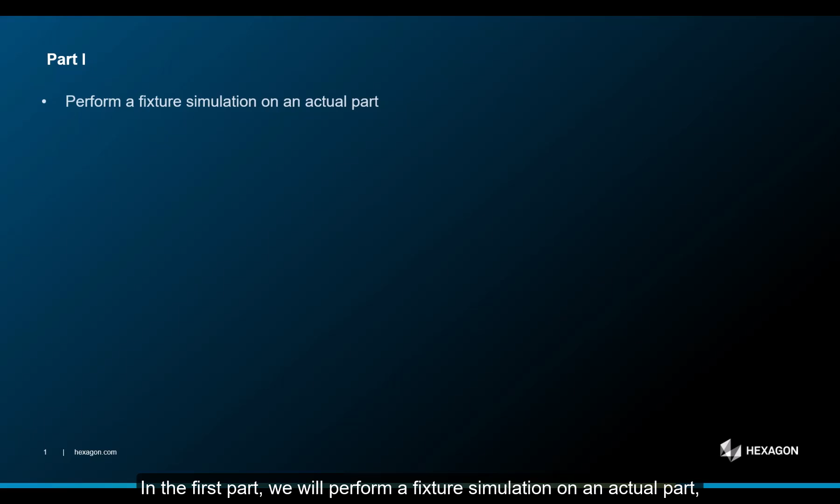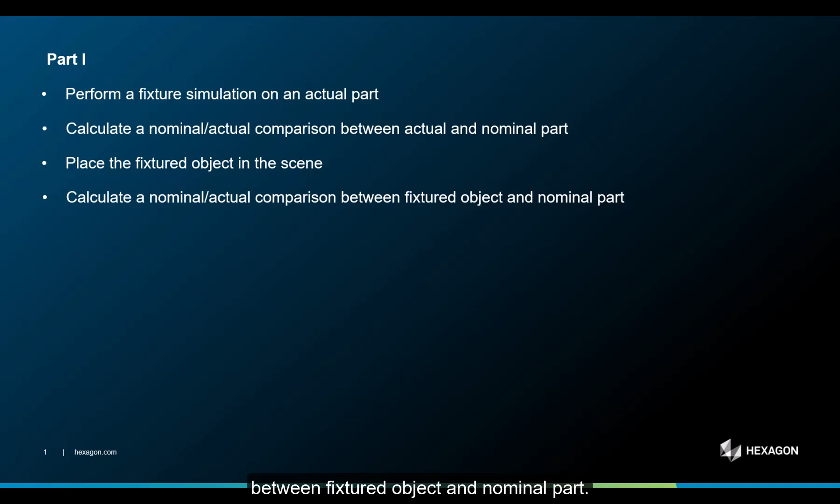In this video, I will show you how to use a fixture simulation in an automated workflow. In the first part, we will perform a fixture simulation on an actual part, calculate a nominal actual comparison between actual and nominal part, place the fixtured object in the scene, and calculate a nominal actual comparison between fixtured object and nominal part. In the second part, we will record a macro for each step and combine the macros to a job that can be used in the fully automated VGinline system.

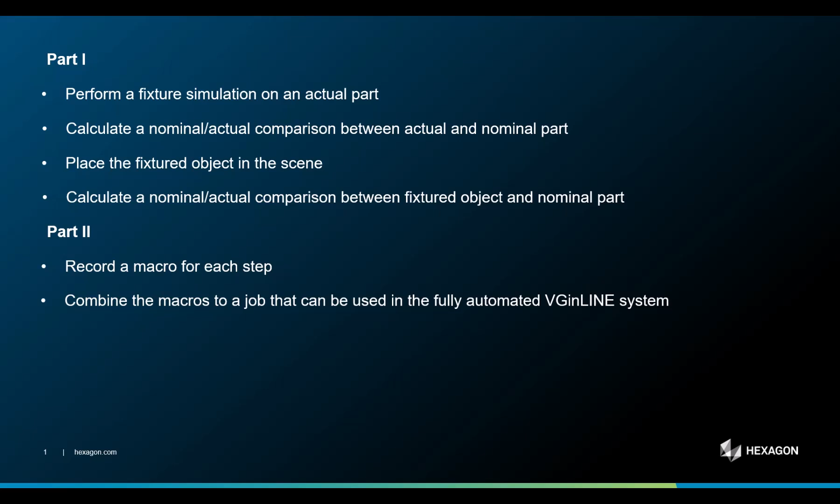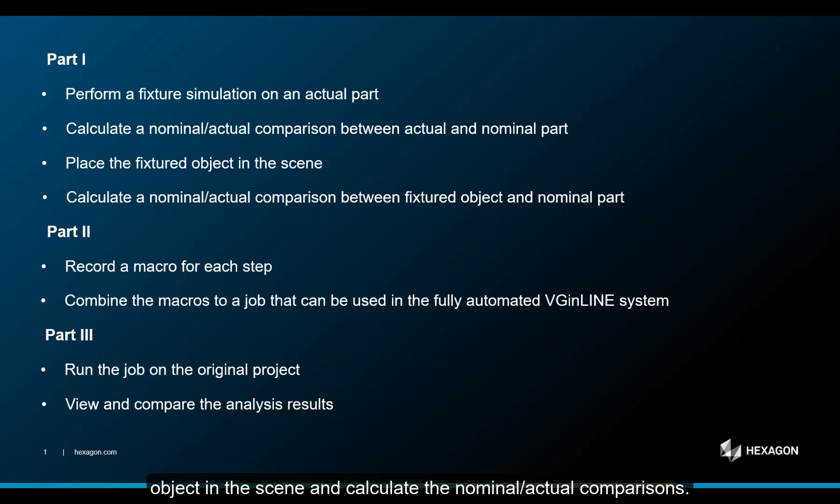In the third part, we will run the job on the original project and finally view and compare the analysis results. So that we can start right away, I have prepared a project that already contains all the objects we need to set up our automated workflow. Let's get started. Remember, first we want to perform the fixture simulation, place the fixtured object in the scene and calculate the nominal actual comparisons.

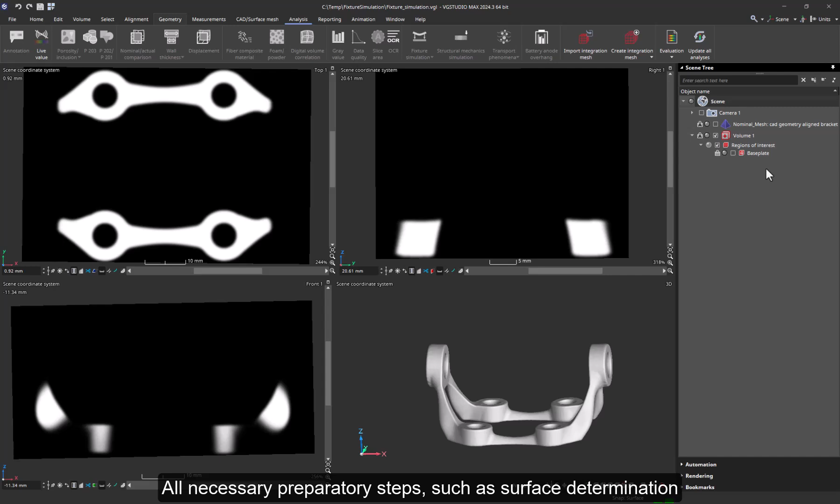I'll open VGSTUDIO MAX, select File, Open, browse for the fixture simulation VGL file, and click Open. In the scene tree, we have the nominal object, nominal mesh, the actual object, volume 1, and the base plate on which the actual object is to be fixed. All necessary preparatory steps such as surface determination and alignment are already done. We can immediately start and perform the fixture simulation for the actual object.

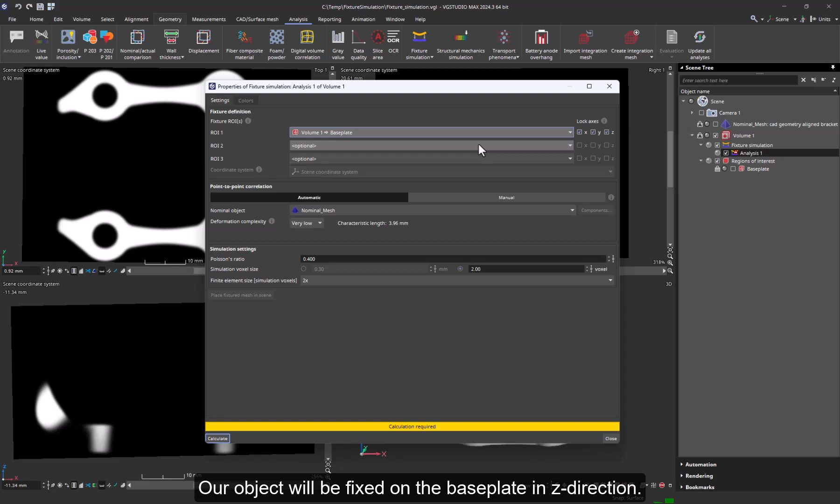Therefore, I'll select Volume 1, the actual object, and go to Analysis, Fixture Simulation. Here I need to select the fixture ROI, in our case the base plate, from the ROI 1 drop-down list. Our object will be fixed on the base plate in Z direction, so I can deactivate the checkboxes in front of the X and Y directions. The calculation might take a few minutes. As soon as it has been completed, we can close the dialog. As you can see, Analysis 1 has been added to the scene tree under Fixture Simulation.

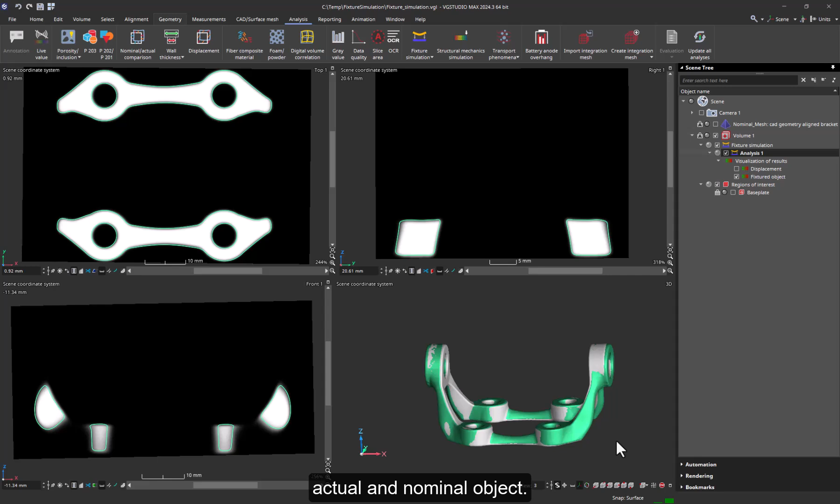Next, I will perform the nominal actual comparison between actual and nominal object. I'll highlight Volume 1 and go to Analysis, Nominal Actual Comparison. Here I'll set the max distance to 1.2 millimeters. To save calculation time, I'll select Performance from the Mode drop-down list. For all other options, I can keep the default settings and click Calculate.

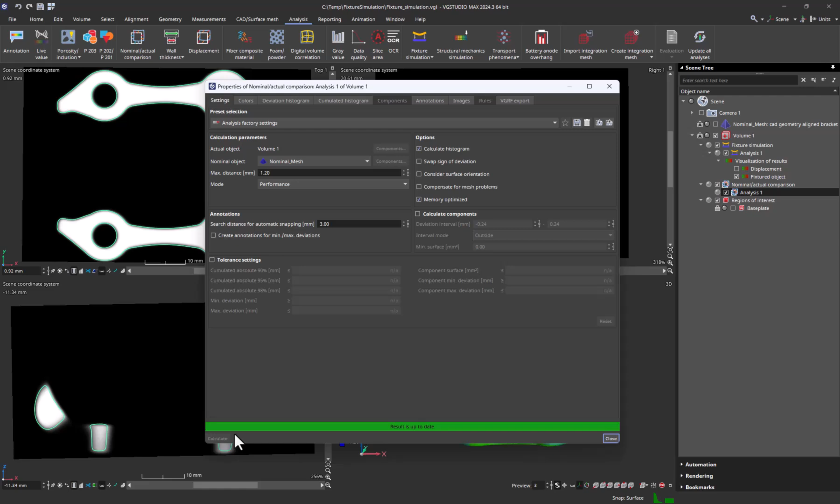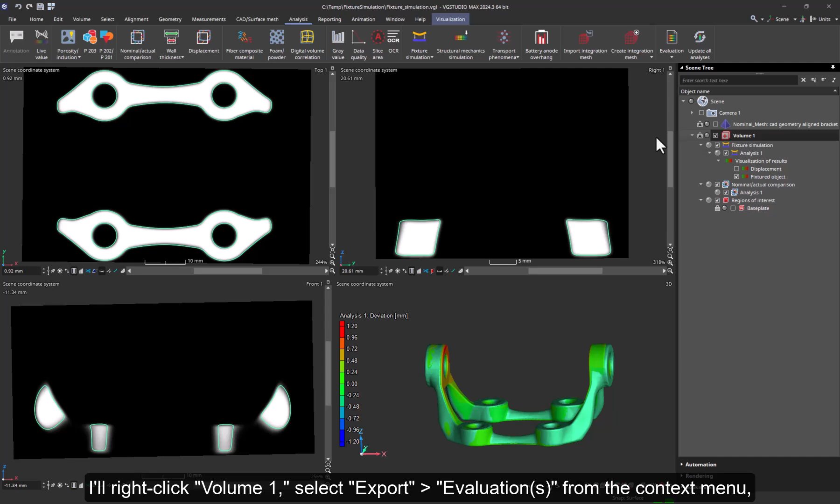To run an analysis in an automated workflow, we need to create an evaluation template that can be imported as a macro step. To do so, we will export an evaluation template that includes the fixture simulation and the nominal actual comparison for the actual object. I'll right-click Volume 1, select Export Evaluations from the context menu, and save the template under the name Fixture Simulation and NAC. If I want, I can add some information here. Then I'll click Save again, and the template will be saved in the specified location.

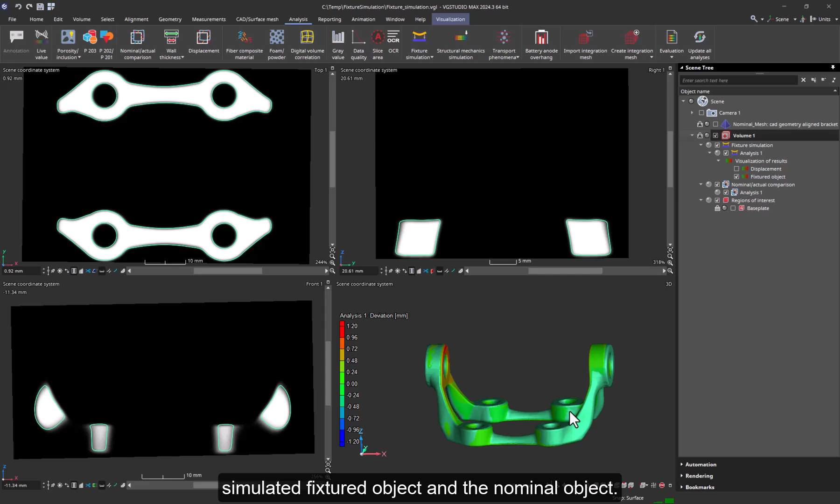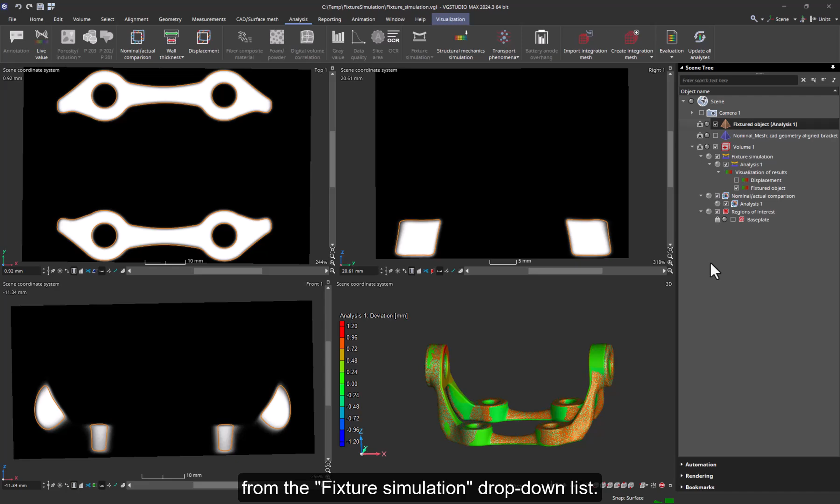Our next step would be the nominal actual comparison between the simulated fixtured object and the nominal object. But the fixtured object is part of the fixture simulation analysis. Since we cannot run an analysis on another analysis, we first need to place the fixtured object in the scene. For this, I'll highlight Analysis 1 of the fixture simulation, and on the Analysis tab, I'll select Place Fixtured Mesh in Scene from the Fixture Simulation drop-down list. This adds a mesh to the scene tree that represents the assembled state of the actual object.

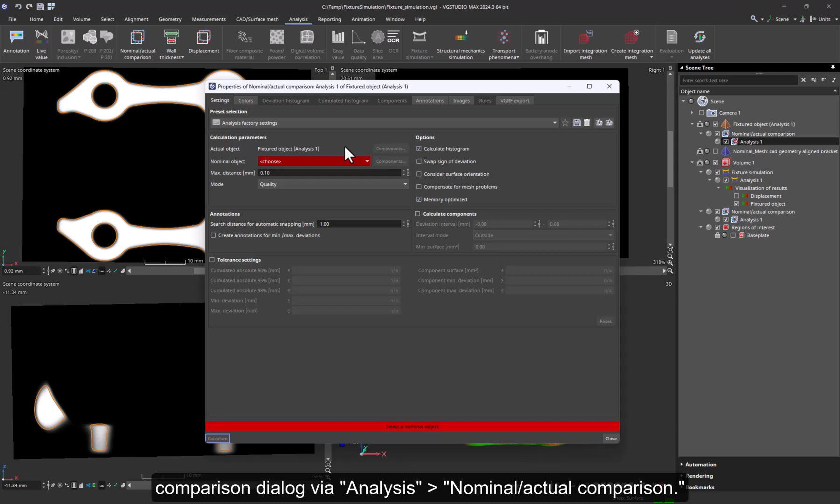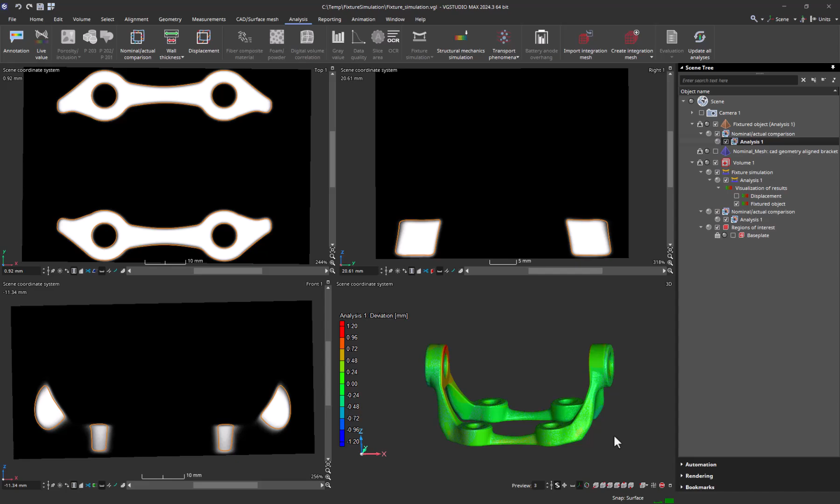Now we can perform the nominal actual comparison between the fixtured object and the nominal object. I'll highlight the fixtured mesh and again open the Nominal Actual Comparison dialog via Analysis, Nominal Actual Comparison. I'll select the nominal object, nominal mesh, and specify the same settings as before. Then I'll click Calculate and close the dialog when the calculation has finished. And that's all we need for our second evaluation template. To export it, I'll highlight the fixtured object, select Export Evaluations, and save the template as fixtured object NAC.

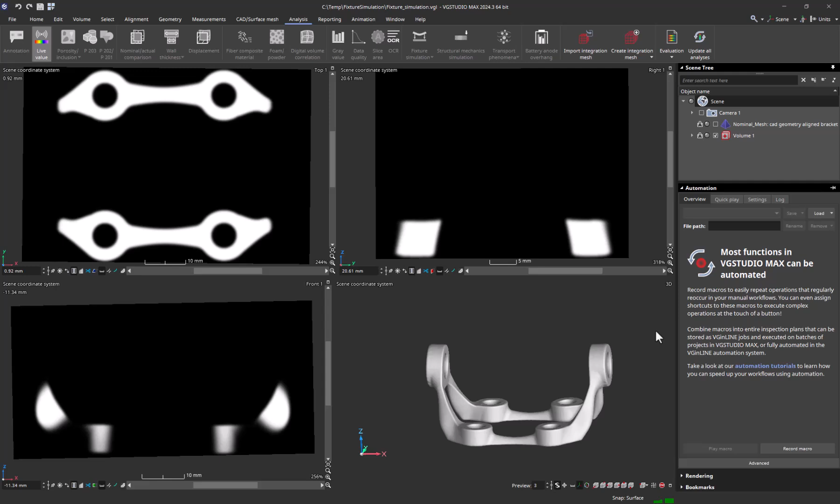The first part is done. We can clear the scene by selecting File, New without saving the project. Next, we will create a macro for each step and combine the macros to a VGinline job. Therefore, I'll open the original Fixture Simulation VGL project again. Let me check whether the Automation tool is available in the tool dock. If not, I can add it by activating Automation in the Tools drop-down list on the Window tab. Let me just release the Automation tool from the tool dock and place it in the middle of the scene. This makes it easier to work with.

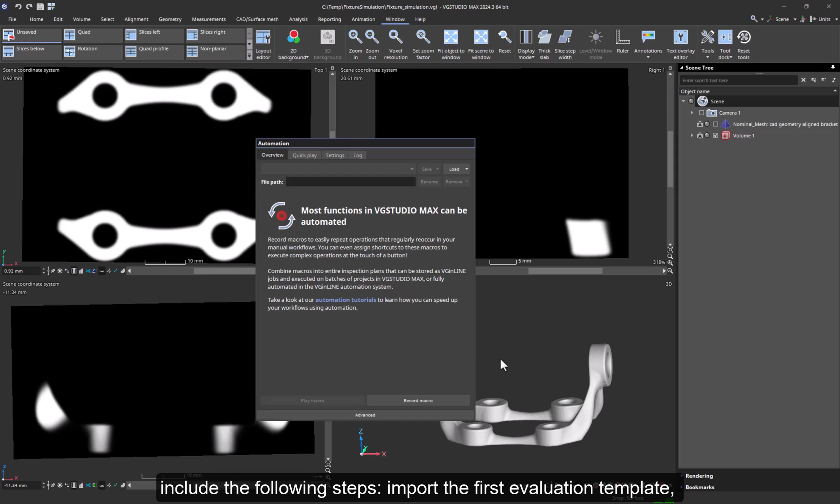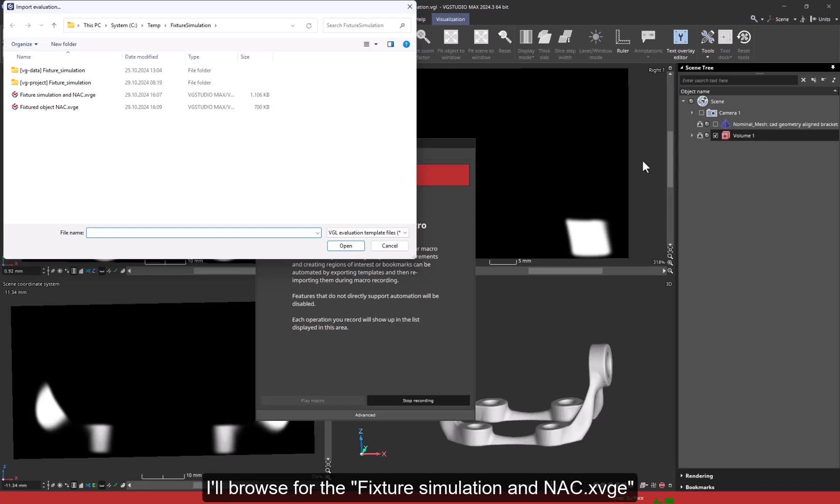For our automated workflow, we need to record 3 macros that include the following steps: import the first evaluation template, place the fixtured object in the scene, and import the second evaluation template. I'll start with the macro that imports the fixture simulation and the nominal actual comparison between actual and nominal object. I'll click Record Macro, right-click Volume 1 and select Import Evaluations from the context menu. I'll browse for the fixture simulation and NAC.xvge evaluation template file and click Open. Here I can keep the default settings and click OK. As soon as the evaluation template has been imported, I can stop the recording. With that, the macro step Import Evaluation Template will appear in the Automation tool.

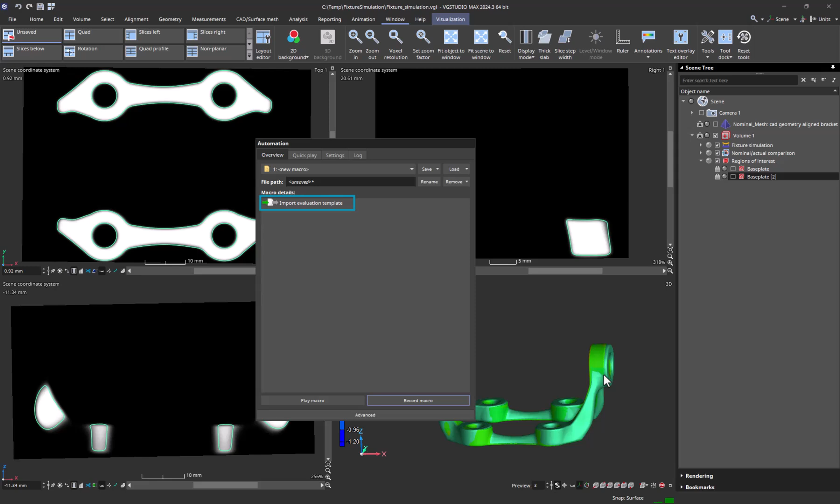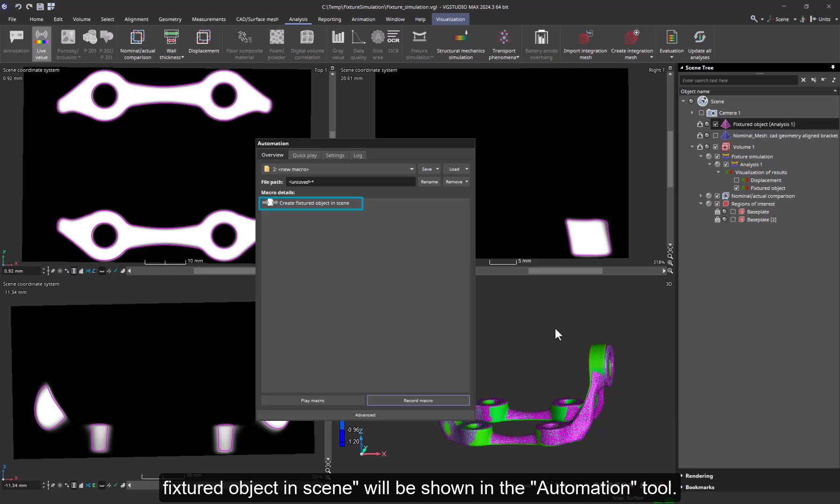Our next macro will place the fixtured object in the scene. I'll start the recording again. In the Scene tree, I'll click Analysis 1 under Fixture Simulation, and on the Analysis tab, I'll select Place Fixtured Mesh in Scene from the Fixture Simulation drop-down list. After the recording has been stopped, a new macro step, Create Fixtured Object in Scene, will be shown in the Automation tool. Finally, I'll record the macro to import the nominal actual comparison between fixtured object and nominal object. Once again, I'll click the Record Macro button. This time I'll select the fixtured object in the Scene tree to import the fixtured object NAC.xvge template file.

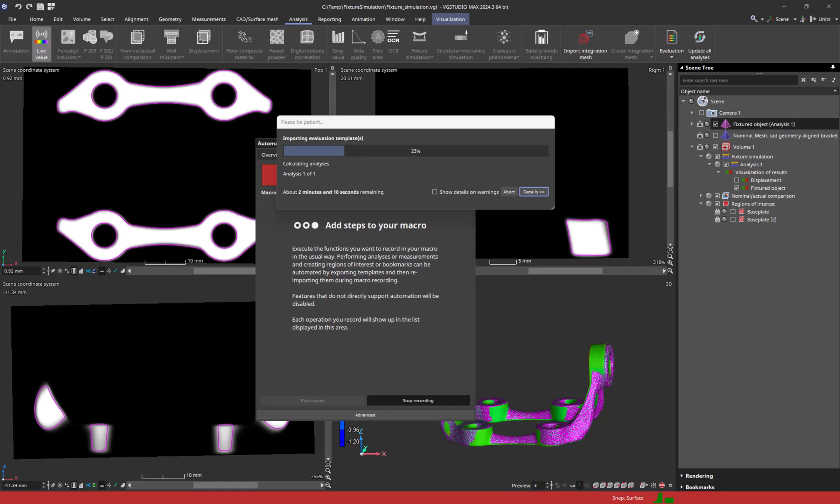Now that all the macros have been recorded, we can organize them and create a job for VGinline. For this, we need some additional options, which are available in the Advanced dialog of the Automation tool. I'll click Advanced to open the Automation Advanced dialog.

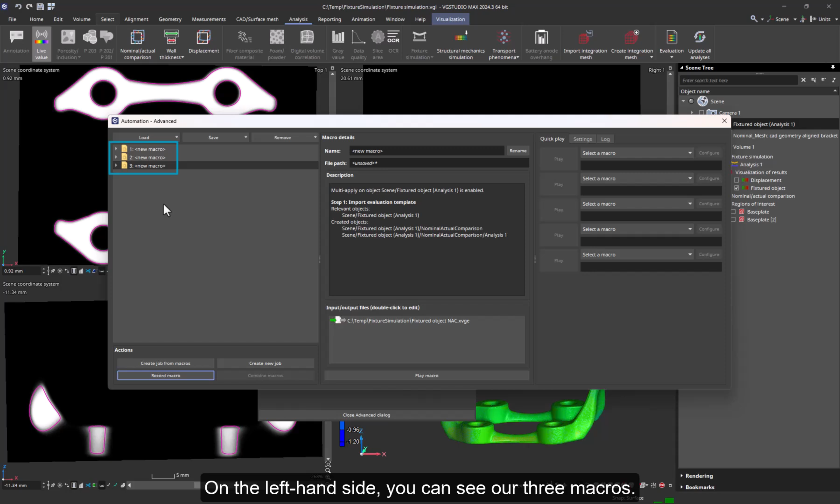On the left-hand side, you can see our 3 macros. By clicking the triangle in front of each macro, we can expand them to see which action they include. It's always a good idea to name each macro according to the corresponding action and save it. Let me just do this by selecting the first macro and clicking the Save button here.

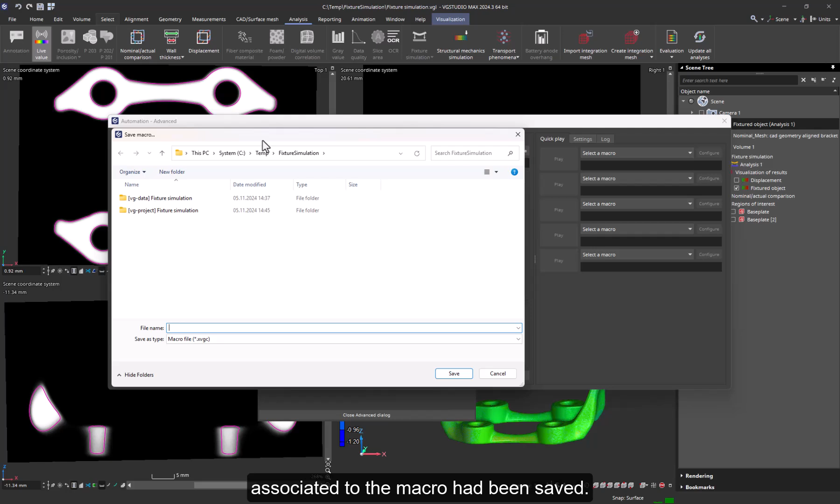The Save Macro dialog will open under the path where the evaluation template associated to the macro had been saved. I'll add a name for the first macro and click Save. I'll repeat this step, choosing a suitable name for each macro.

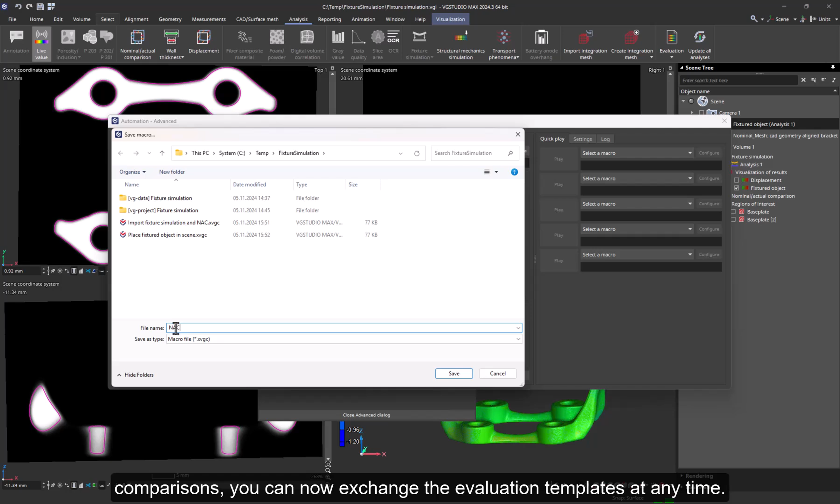If necessary, for example, if you want to adjust the settings for the nominal actual comparisons, you can now exchange the evaluation templates at any time. Remember, for this video tutorial, we wanted to create a job that can be used in VGinline. Therefore, I'll highlight the macros and click Create Job from Macros.

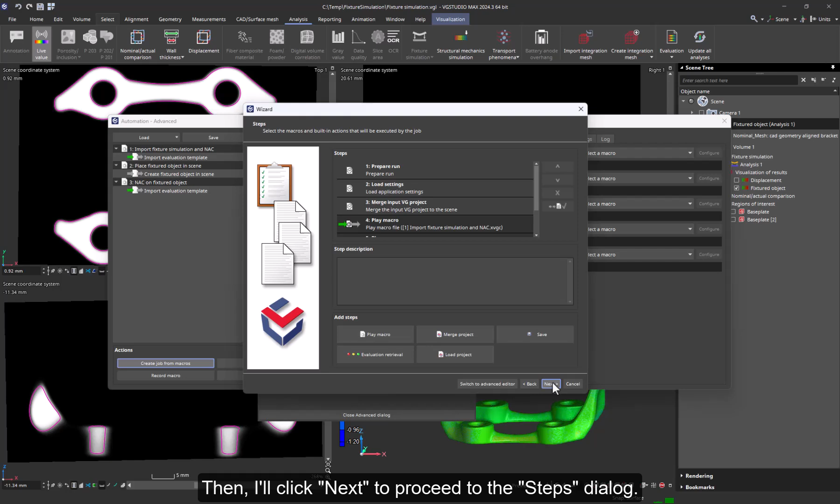In this wizard, I need to enter a name, for example, Automated Fixture Simulation. Then I'll click Next to proceed to the Steps dialog. This dialog shows an overview of the available macros and provides several options to rearrange them and to add additional macros. In this case, I want the final project to be saved after the job has been processed. To add a corresponding macro step, I'll click the Save button here.

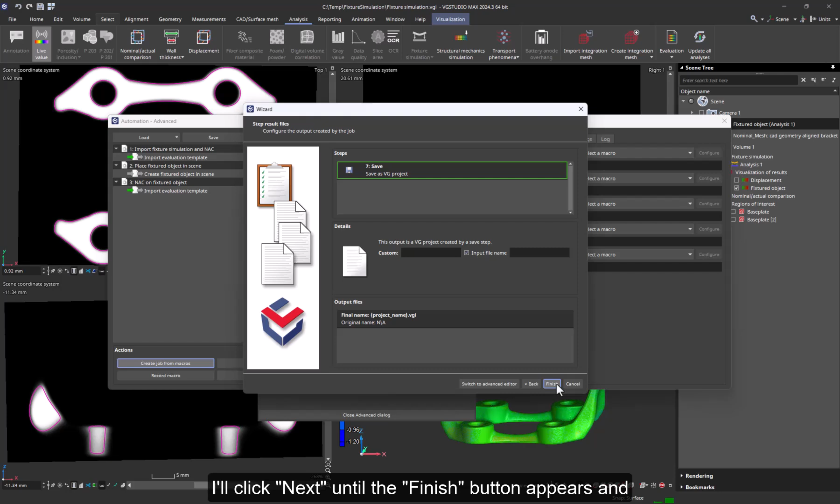And that's all we need to do to make our job run. I'll click Next until the Finish button appears and click it to close the job wizard. The new job is now visible in the Automation tool. By clicking the little triangle in front of the job, you can expand it and see whether all necessary steps are included.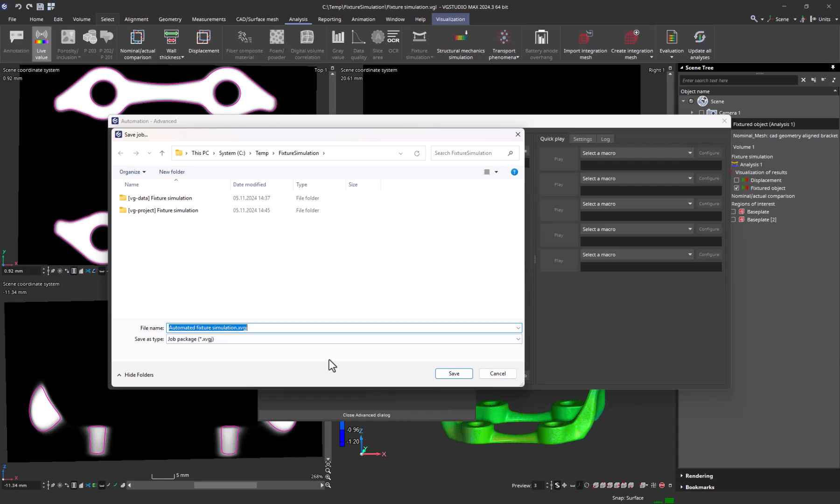Our job has been created successfully. All necessary steps are there. I'll click Save to save the job. After that, I'll click File, Quit to close the application without saving the project.

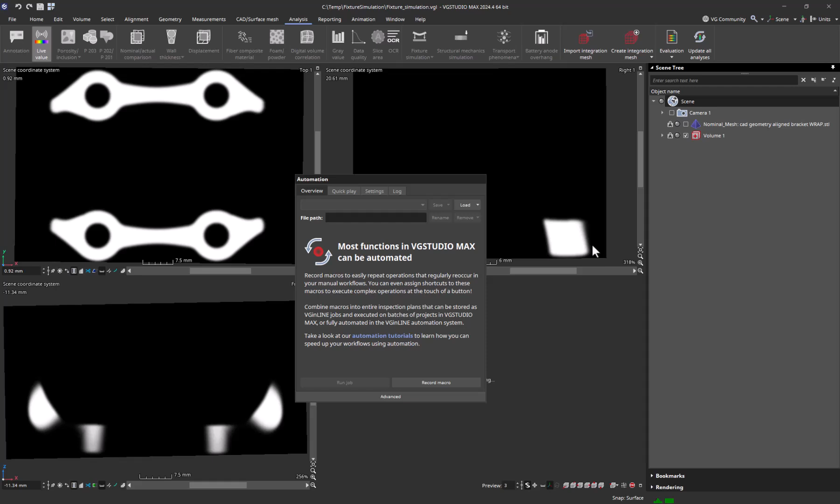Now comes the exciting part. We will try out the automated workflow and take a look at the results. I'll restart VG Studio Max and select File, Open. I'll select the original fixture simulation VGL file. In the Automation tool, I'll click Load, browse for the Automated Fixture Simulation XVGJ file to load the job, and click Run Job.

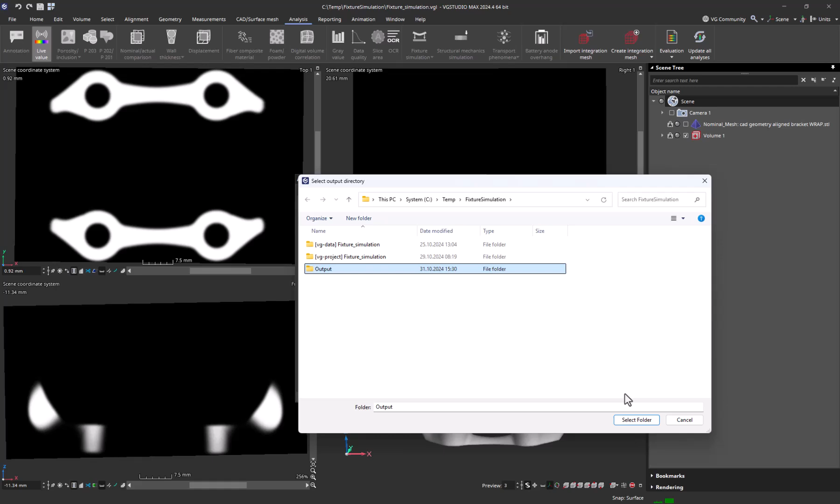In this dialog, I need to create an output folder where the final project will be saved. To keep it simple, I'll name it Output. Then I can click Select Folder to start playing back the job. It might take a while until all macro steps will be processed.

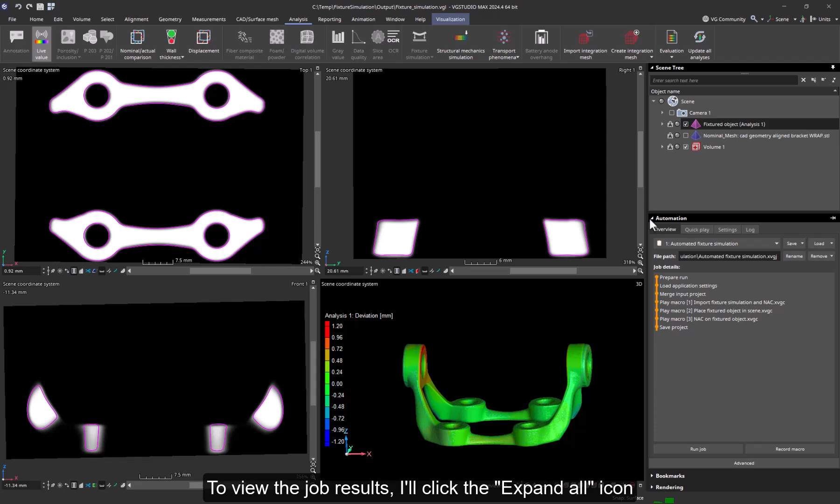After the job has been completed, I can drag the Automation tool back into the tool dock. I won't need it anymore. To view the job results, I'll click the Expand All icon at the top of the Scene Tree tool. Now we can see all the objects and analyses that have been created.

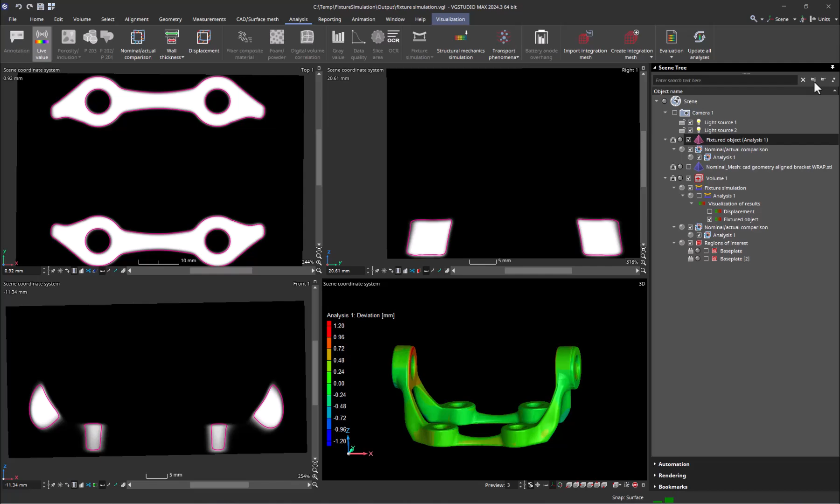What we want to do now, and that's the real purpose of our workflow, is compare the results of the nominal actual comparisons between actual and nominal object and between fixtured object and nominal object. For a better visualization, I'll click the little toggle full screen state icon down here to set the 3D window to full screen. In the scene tree, I'll set all objects to invisible except for the fixtured object, the volume object, and the associated nominal actual comparisons.

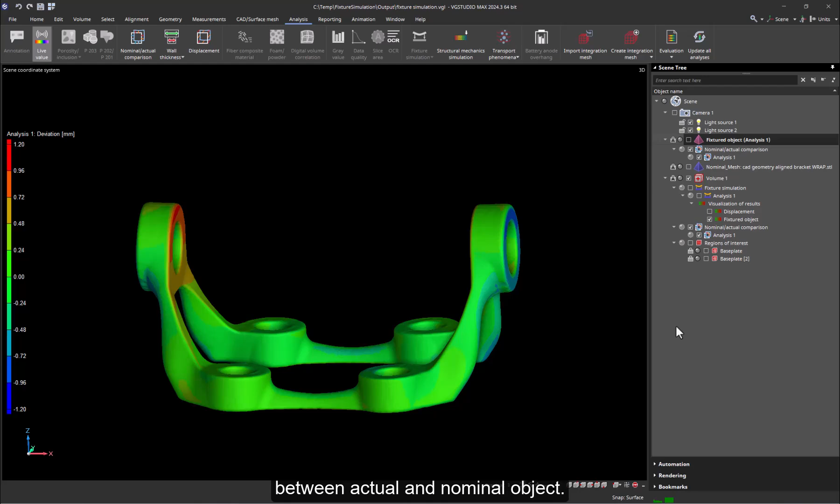Okay, now let's deactivate the checkbox in front of the fixtured object to visualize only the deviations resulting from the nominal actual comparison between actual and nominal object. Let me quickly check whether the live value option is activated on the Analysis tab. Okay, with the live value option activated, the deviation value will be displayed at the corresponding cursor position.

As you can see, there are significant deviations at the top left and the top right, as well as some minor deviations at the bottom of the object. Now, what about the fixtured object? Let's have a look at the deviations there.

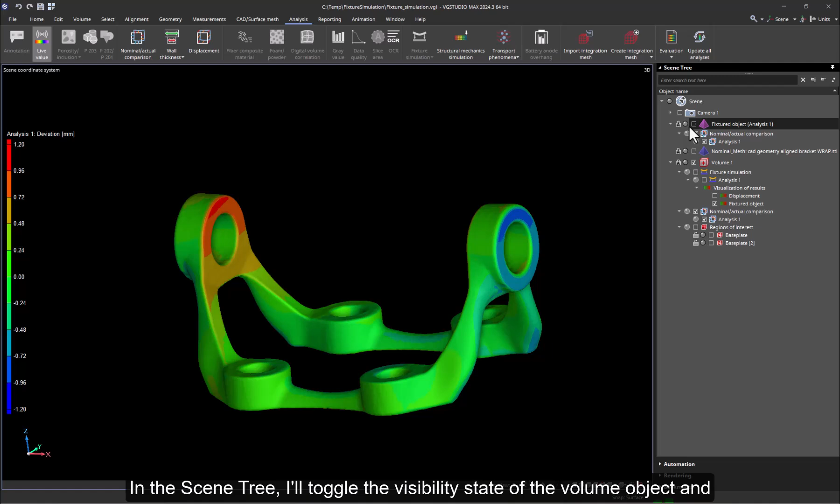In the scene tree, I'll toggle the visibility state of the volume object and the fixtured object by activating and deactivating the corresponding checkboxes. On the fixtured object, the deviations have almost completely disappeared. There aren't any deviations on the right and only a few minor spots on the left and at the bottom.